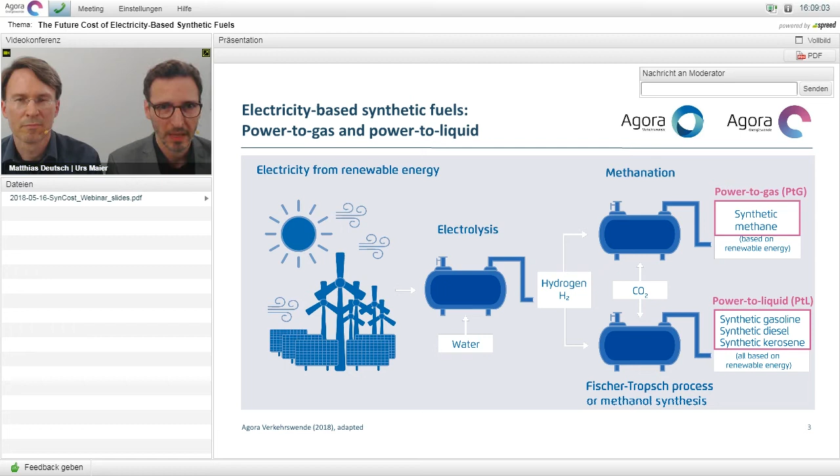So let's say a few words about the study. It is commissioned by our two think tanks, Agora Verkehrswende and Agora Energiewende. Frontier Economics did the work. The guiding questions were: how can the cost of importing synthetic fuels, that is methane and liquid fuels, develop until 2050? With an exemplary analysis for North Africa, for Middle East, and for Iceland.

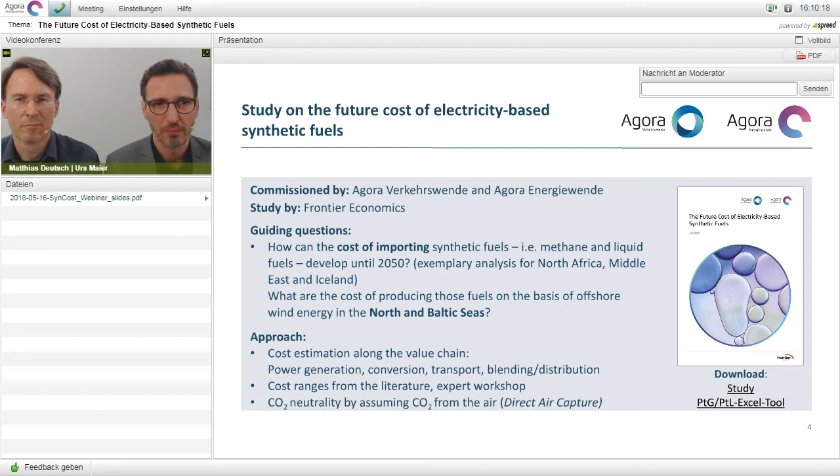And the second question, to compare that to the German context, was: what are the costs of producing those fuels on the basis of offshore wind energy in the North and Baltic Seas? The approach, a cost estimation along the value chain, so power generation, conversion, transport, blending / distribution. The cost ranges Frontier got from the literature and also from an expert workshop that took place here at the Agoras. And it's important to mention that CO2 neutrality we got by assuming CO2 from the air, so direct air capture.

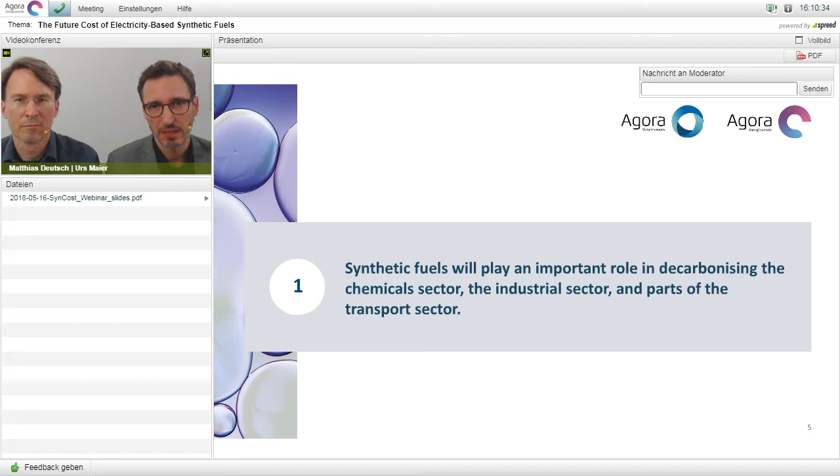So if we look at the situation right now, against the background of the Paris Agreement, the German climate protection goals, and other countries' climate goals, can we substitute those fuels on a one-to-one basis with the electricity-based synthetic fuels we just introduced? We think no, and that is mainly because of the conversion losses, because of high efficiency losses you get from producing those fuels. So we brought you 2 examples to visualize those conversion losses, and I'll start with the one on transport.

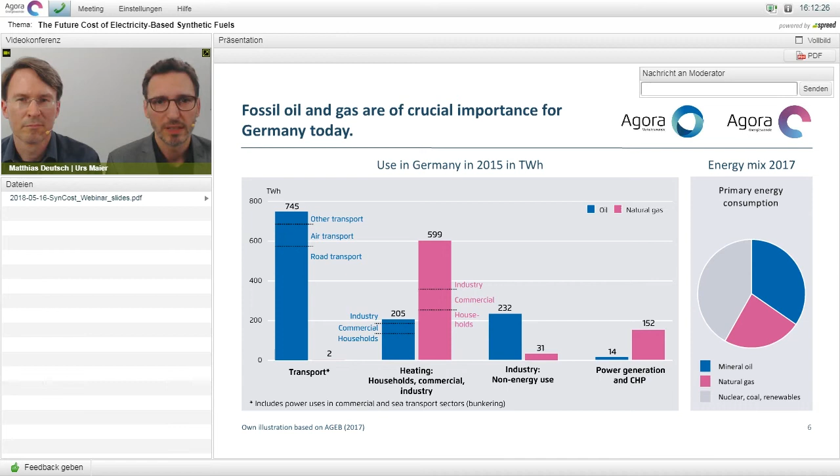Mainly because of the conversion losses, but also, and this is important to mention, because of the lower efficiency of the internal combustion engine vehicle in comparison to the electric motor. So far as to the transport example. So let's also have a look at heating, the heating sector.

And by the way, we didn't come up with those figures by ourselves. We basically drew them from the German National Academy of Engineering that published something last fall, and we drew most of the figures from them. So we think that's a pretty robust understanding of what the conversion losses are. But let's look at the heating sector.

the importance here is that when you now look to the left column, electric heat pump, you basically used your renewable power to pump it up, so to speak, and with an annual coefficient of performance of 3, you end up with nearly 3 times as much energy that you can use for heating as you have put in as renewable power. And that is because we can use ambient energy from the environment, that is from the air, from soil or water, and then add that to the renewable power and use this entire energy more or less.

And the comparison is simple. If you compare the 45% in the middle and the 50% to the right to the 285% there, you get the idea of what it means to have high conversion losses for synthetic fuels.

Now, the open question, of course: those figures that we just presented for transport and for heating are pretty much physics-based and more or less indisputable in that sense. So, can those indisputable disadvantages of synthetic fuels be offset or more than offset by some kind of advantages, for example, by avoidance of infrastructure cost?

That's an open question. Our understanding is there's not that much research out there, and there's a need for better research, a better understanding, for example, of the gas infrastructure system and under which conditions and where and maybe in what time frame there could be those advantages that can more than offset those obvious disadvantages.

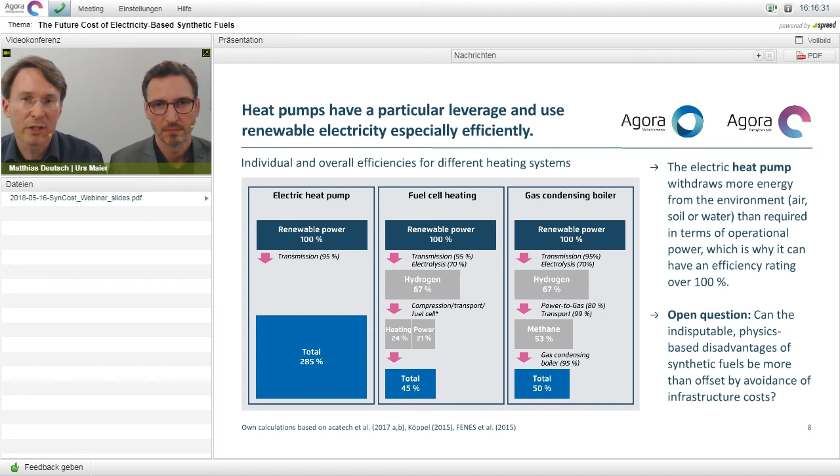Now, what we have done is we have tried to systematically put all sectors together in a big table that you can find in our publication. And now we go back to transport, which is the first line in this big table of sectors, to see what a meaningful priority would be to think about using renewable power.

Yeah, and here you can see the transport example. In the second column you see there's a first priority, direct use of electricity, and we put together some means of transport. And we also have in the third and fourth column hydrogen and CO2-based power to gas and power to liquid as supplemental approaches, as synthetic fuels.

So the key messages you can find on your right-hand side. For road transport, the direct use of electricity should have priority. Long-haul trucks and buses will possibly use power to gas and power to liquid, although it is more efficient in terms of energy use to go for overhead catenary contact line trucks or battery powered trucks, and of course it's always good to shift from road to rail.

But if you want to go for power to gas, then hydrogen is more efficient than CO2-based power to gas or power to liquid and should therefore have priority. Power to gas and power to liquid will indisputably be employed in air and sea transport. There it can't be foreseen today that it will be possible to travel by plane from Europe to Australia just on batteries.

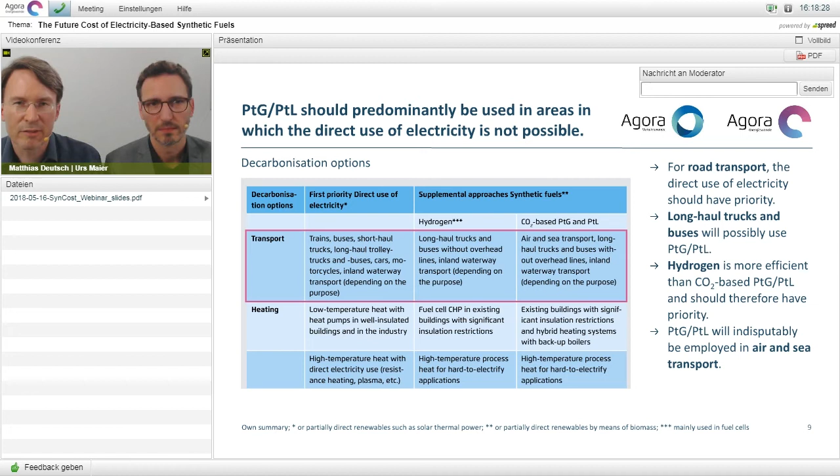Let's have a look again at heating, building on what we already said. For building heat, the direct use of renewables, including deep geothermal and solar thermal, should have priority together with electricity—that means heat pumps for sufficiently insulated buildings. That's critical, and useful also in combination with heat grids. When you get to insulation restrictions, then maybe fuel cell combined heat and power with hydrogen or CO2-based power to gas, power to liquid is a supplemental option we should look at.

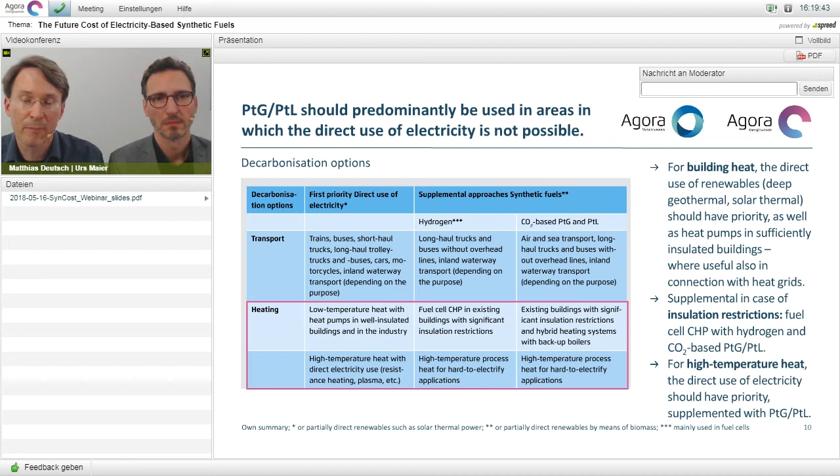This is low temperature. When we look at high temperature heat as process heat in industry, again, the direct use of electricity should have priority. We should really carefully look at other options—there's a lot of interesting physical processes out there. There's not only resistance heating, but also infrared heating, some kind of plasma heating, different forms we should look at before simply switching to the default we are used to, which is burning stuff. So in the past we have burned fossil fuels, and if we can't go any further, then maybe we will need power to gas, power to liquid for getting high temperature heat as well.

There are two other things we need to look at: industry in the broad sense, including chemical industry. Obviously if you need certain molecules, then you cannot just use electricity. So if you have some kind of inorganic chemistry to deal with, then maybe you need hydrogen first, which could be the basis for ammonia production, or you could produce steel with direct reduction of iron ore. And if you go to organic chemistry, of course you need some kind of organic basic chemicals, and there it makes sense to produce synthetic fuels that are CO2-based, and then you can derive other chemicals from that basis.

Now the last thing we want to mention is something that has been up for debate, but I think now it's the least critical problem here when we talk about the power sector, because obviously for short-term storage, like say storing electricity for a day or so, batteries are a priority in our understanding.

So the question is, what do I do if I have long-term storage problems, maybe seasonal storage? There you need a chemical energy carrier, so what you will do is produce hydrogen and probably also CO2-based power to gas, then store that and reconvert it in gas-fired power plants for those times where there's low feed-in from wind and low feed-in from solar, known in Germany as Dunkelflaute. So certainly power to gas will have a role to play in the power sector for long-term storage, at least when we get closer to very deep decarbonization scenarios of minus 95% or so.

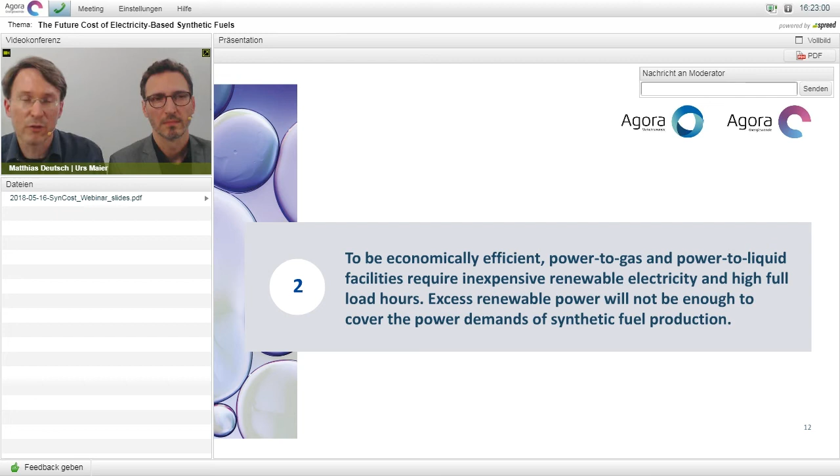Our second conclusion is, to be economically efficient, power to gas and power to liquid facilities require inexpensive renewable electricity and high full load hours, that is, high capacity utilization. Excess renewable power will not be enough to cover the power demands of synthetic fuel production. The question is, how can you operate an electrolyzer, which is kind of the core technology, to make it profitable, to make it competitive? The literature says you would need at least 3,000 to 4,000 hours per year. If you could run it all year long, but that's usually not an option. So 3,000 to 4,000 hours—can you find a source of cheap renewable electricity supply for that long? Let's have a look.

What you can see in the upper part of this diagram is hours per year, and in the upper part we see excess power for Germany. There are some projections by the German National Academy of Engineering, some simulation runs, of how many hours of excess renewable electricity power we can expect for the next 10 to 15 years to come. What you see is in the next 10 to 15 years this excess power reaches around 1,500 hours per year at maximum.

Well, then some people say, maybe it's not that we have this excess power in the whole German electricity system—maybe it's just a regional thing, maybe because of regional and local grid bottlenecks. So there's another study by some researchers that have looked at the northern region, the northern state of Schleswig-Holstein, north of Germany.

And they have pretty aggressive onshore wind expansion plans. Now, if they fulfill the onshore expansion plans of the government in Schleswig-Holstein until 2025, they could reach a maximum of around 1,500 hours of regional excess power, so to speak. Well, both figures for the whole of Germany and for Schleswig-Holstein are not really reaching the 3,000 to 4,000 hours you would like to have to run an electrolyzer economically.

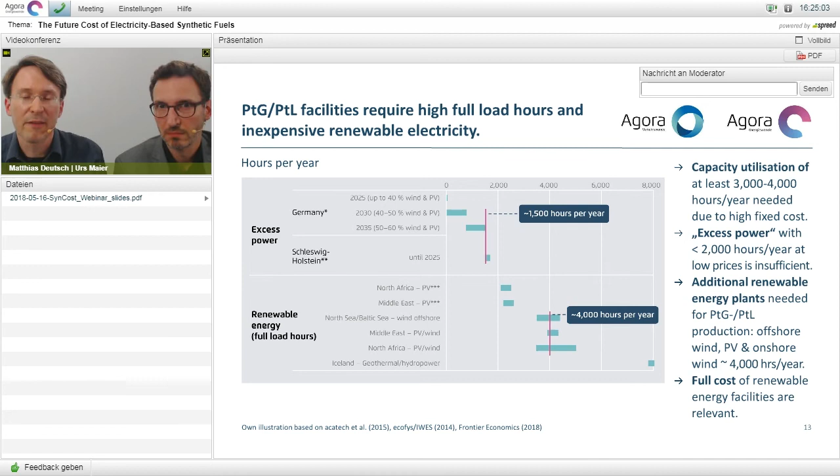And by the way, for Schleswig-Holstein, there's an additional fact that's critical. Once the transmission system has been expanded in Germany, then the local grid bottleneck will disappear. That means that at first, you may have local grid bottlenecks and you may have excess power, but once the transmission lines have been built, maybe with some years of delay, then all this excess power in that region will disappear, and that cannot be a basis for 4,000, maybe 4,000 to 5,000 hours.

That's critical, and that is exactly what Frontier has done in the calculation of the synthetic fuel cost. So you'll see full cost of renewable energy facilities, you'll see conversion plants with electrolyzers, and you'll have, as my colleague mentioned at the beginning, CO2 from the air with direct air capture, all factored and priced in to reach those cost estimates of the future. So now let's look at the cost. And I'm on the next slide with our third conclusion.

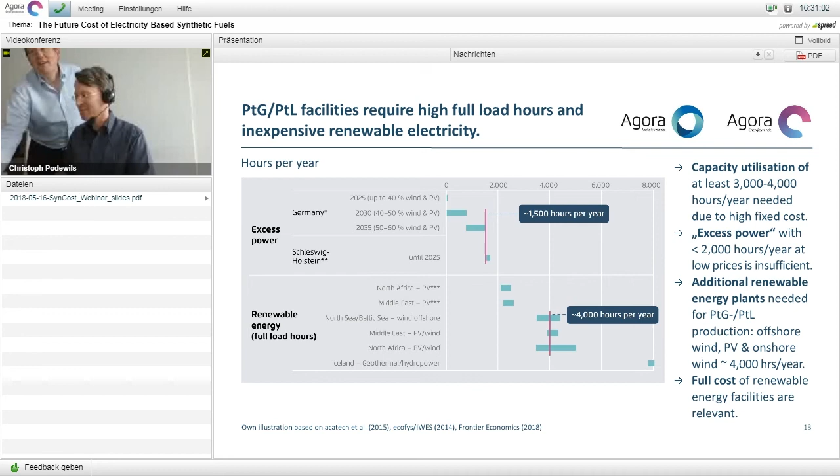Our third conclusion will come up in a second. Sorry, this is again a technical challenge. So what you can see now is that

Our third conclusion is that in the beginning, synthetic methane and oil will cost between 20 and 30 cents per kilowatt hour in Europe, and costs can fall to 10 cents per kilowatt hour by 2050 if, and that's a big if by the way, if global power-to-gas and power-to-liquid capacity reaches around 100 gigawatts.

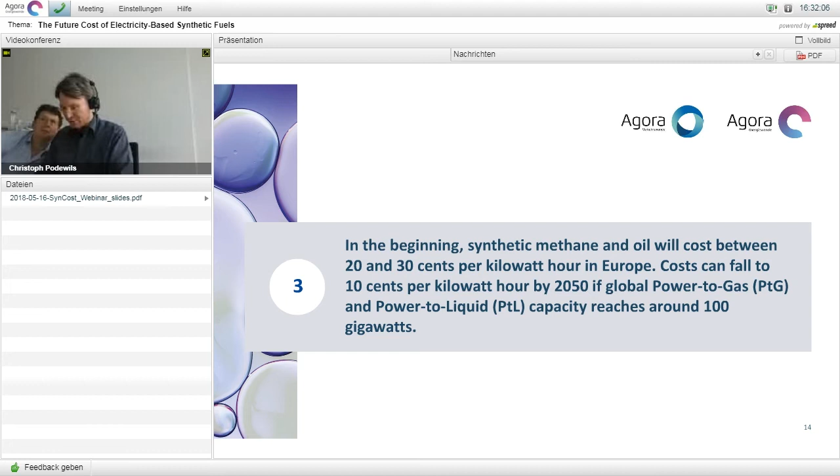Now, what you will see on the next slide is large cost ranges, which is our summary of Frontier's results. You'll see large cost ranges with a reference cost in the middle, and in that diagram we also mixed gas and liquid just to have a big summary with broad lines of thinking that emerges from this graphic. And so we'll now go to the next slide, and the next slide shows you a big summary of results.

Let's start with the y-axis. The y-axis shows cents per kilowatt hour, and let's then look at the blue cost ranges. Blue represents offshore wind production in the North and Baltic Seas, and you see that in the early 20s it goes from 24 cents per kilowatt hour, that's what we call the reference cost. It goes down to around 20 cents by 2030 and around, let's say, 13 to 15 cents by 2050. That's the blue cost ranges.

When you look at the very bottom of the diagram, you see fossil cost as a comparison. Those are cost projections from the IEA and the World Bank. It's a mix. And you see that they go slightly up, but at the core, the synthetic fuels produced with offshore wind will always be more expensive than fossil fuels.

Now look at the pink color. The pink color represents PV and PV-wind systems that are producing synthetic fuels in North Africa and in the Middle East. The basic idea is pink is less expensive than blue, so it is cheaper to import from the southern Mediterranean than to produce them with offshore wind at home.

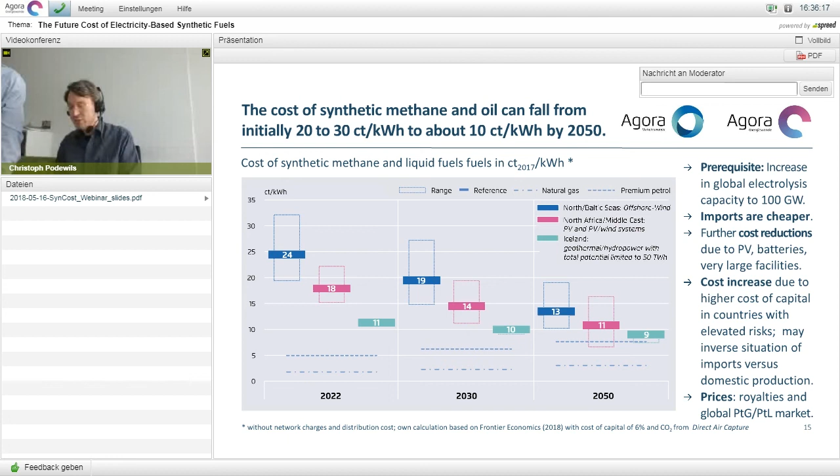We know that. Remember PV came to major cost reductions by scaling up PV on this planet tremendously, first in Germany and some other countries and then in China. And the same question here is, how can we go through the cost learning curve of electrolyzers? And we think that those cost reductions require considerable early and continuous investments into electrolyzers. And that is an international challenge.

And when you look at those learning curves, you can come to the conclusion that you need something in the order of 100 gigawatts to reduce cost, as Frontier has assessed those cost reductions. Compare that to the global stock today. We have around 20 gigawatts in the chemical industry installed electrolyzers. That is mostly alkaline electrolyzers. That's what the literature says. And so getting from 20 to 100 is quite something.

And there are some other uncertainties when it comes to cost. For example, the technology of direct air capture for assuring climate neutrality is less mature than most of the rest of this technology here, and so it's unclear how easily we can reduce cost there.

The key idea from the last slide is, well, as long as fossils are so inexpensive, then we need either high CO2 prices to have more synthetic fuels coming up, because by themselves they will not show up in the market. They cannot compete yet with fossil fuels, or you need some other kind of political intervention. So this is both important. And let me add one more thing here.

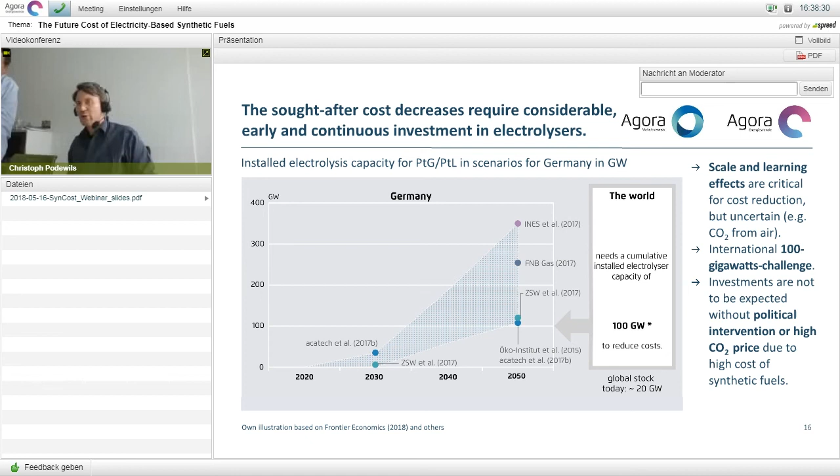Well, on the left side of this diagram you can see some German climate scenarios. I'll not go into details here, but the simple idea is that there are some scenarios out there for Germany by different institutions that foresee a lot of electrolysis in Germany alone. But the question here really is, can Germany alone bring down the cost to reach those competitive cost levels? And one final thought, and then I'm kind of done with the technical part of this analysis.

The big advantage is no CO2 involved, so no need for direct air capture. The big disadvantage is that we cannot simply use existing infrastructure, and we cannot simply use the end-use applications. And with that, I'm handing over to Urs.

So from my side, you have heard something about cost reductions, about a necessary massive scale-up of electrolyzers, of massive investments that we need, and maybe some infrastructure considerations. But I've also said we need political intervention. Now let's think about this political intervention.

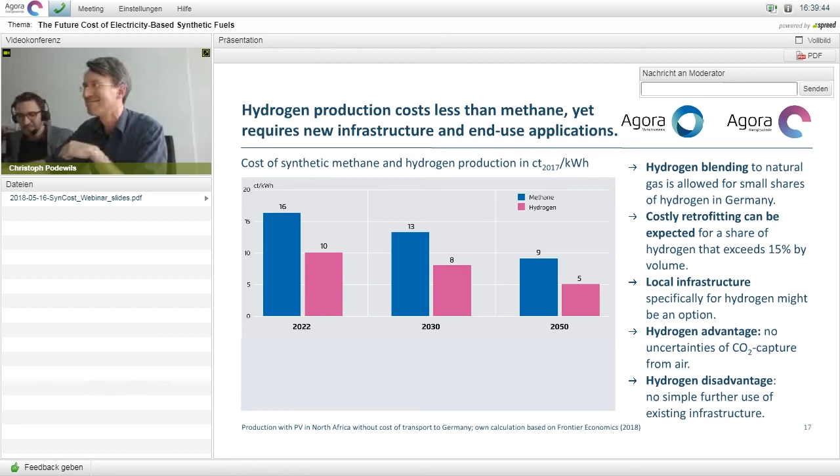Yeah, hello, and this is me again, and we are having the next slide in a second. Yeah.

The fourth key conclusion: we need a political consensus on the future of oil and gas that commits to the phase-out of fossil fuels, prioritizes efficient replacement technologies, introduces sustainability regulations, and creates incentives for synthetic fuel production.

Three building blocks. First, phase out of fossil oil and gas. The new thing can't come if the old one doesn't leave. So we need a gradual decrease in the total use and associated emissions. We need, as a second block, a priority for efficient replacement technologies, for example, battery electric mobility and electric heat pumps. So it's not a one-to-one substitution, as I said at the beginning, when we looked at the use of oil and gas in Germany. And the third block, incentives for synthetic fuel production on the basis of sustainability standards for power to gas and power to liquid, and application-specific targets.

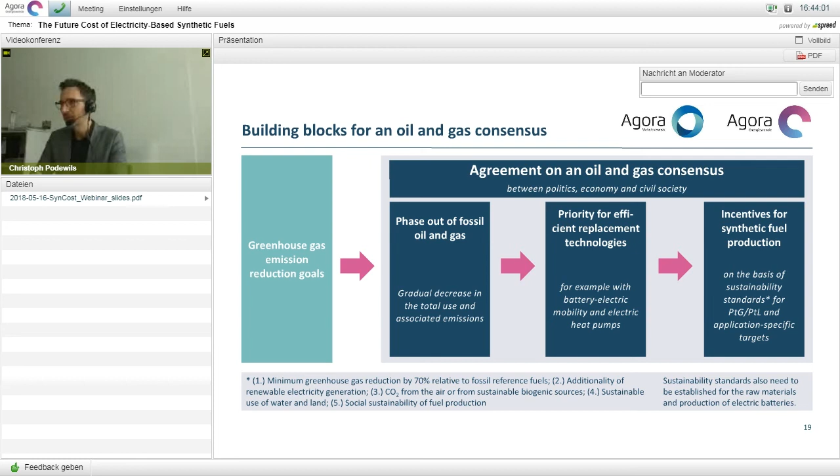Let's have a look at the slide on the sustainability standards. We have 5. The first one is minimum greenhouse gas reduction, and we think that the entire production chain of synthetic fuels should lead to a 70% reduction in comparison to conventional fossil fuels. This is what the European Union, with their Renewable Energy Directive 2, is going to say about advanced biofuels. So it's important to have that standard, because when you look at the conversion losses, the emission factor needs to be multiplied by 1.9 if you want to go for power to liquid. So even with power to gas on the basis of PV energy, you only have a reduction of 80%, because PV production of electricity also has an emission factor.

So the second and the third one are kind of reasons for the minimum greenhouse gas reduction. You have the additional renewable electricity generation. It's important to have additional renewable energy stations, and you need to make sure that it's not just a new mix, where the concerned consumers take the good electricity, and the ones that are not interested get the gray ones. So it'd be a change in the mix overall. And also, it's important to think of the perspective that you have the production of power to gas, power to liquid in North Africa or the Middle East, and it can't be the case that the energy transition there gets slowed down by the usage of the greener electricity produced there for fuels that go to Western Europe, for example.

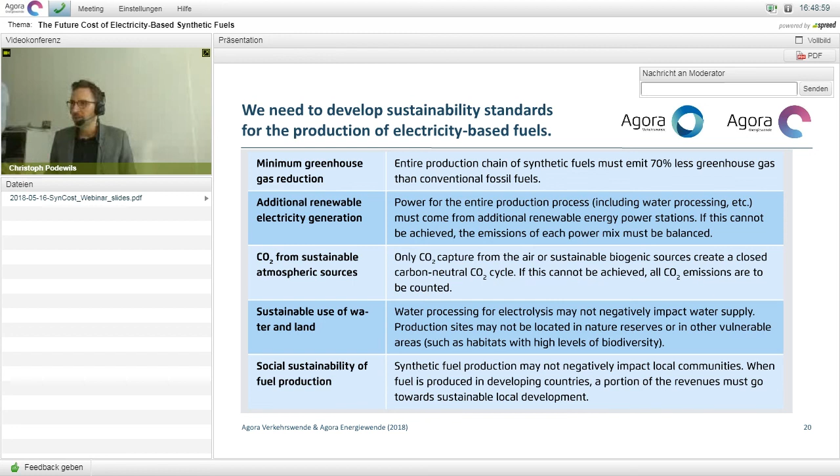I wanna keep it like that, and I have some time for discussion. But I wanna at the end show our conclusions drawn at a glance. Synthetic fuels will play an important role in decarbonizing the chemical sectors, the industrial sector, and parts of the transport sector. Second, to be economically efficient, power to gas and power to liquid facilities require inexpensive renewable electricity and high full load hours. So excess renewable power will not be enough to cover the power demands of synthetic fuel production.

Third, in the beginning, synthetic methane and oil will cost between 20 and 30 cents per kilowatt hour in Europe. Costs can fall to 10 cents per kilowatt hour by 2050 if global power to gas and power to liquid capacity reaches around 100 gigawatts. Matthias explained that. So, the fourth point, we need a political consensus on the future of oil and gas that commits to the phase out of fossil fuels, prioritizes efficient replacement technologies, introduces sustainability regulations, and creates incentives for synthetic fuel production. That's our conclusions at a glance.

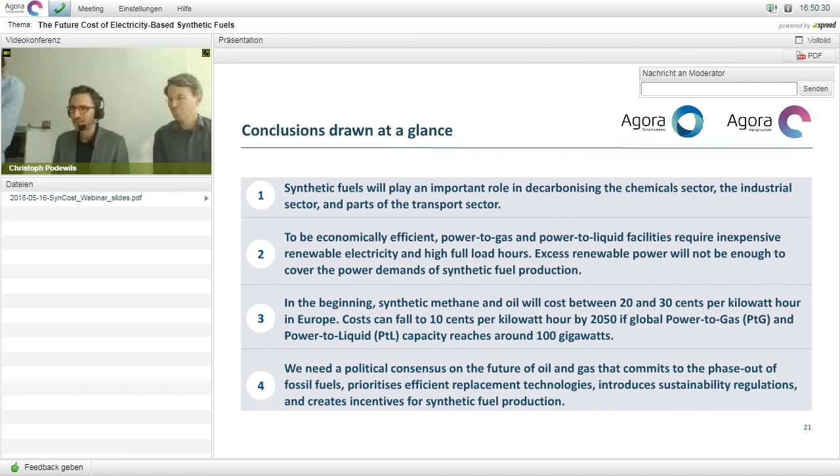Okay. So, Christoph Graf says, "Hi guys, is there a use case where it is more profitable to produce..." Now it's gone. Is there use to produce heat instead of gas or liquids? Okay. Well, is there? Sorry. Different conditions, complicated. May I use the mouse, please, Christoph? Okay.